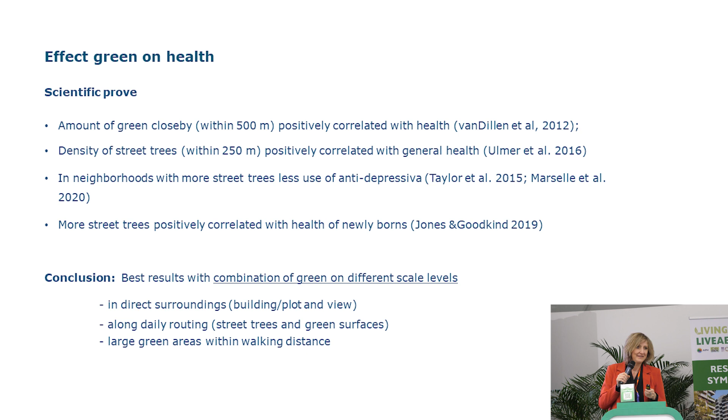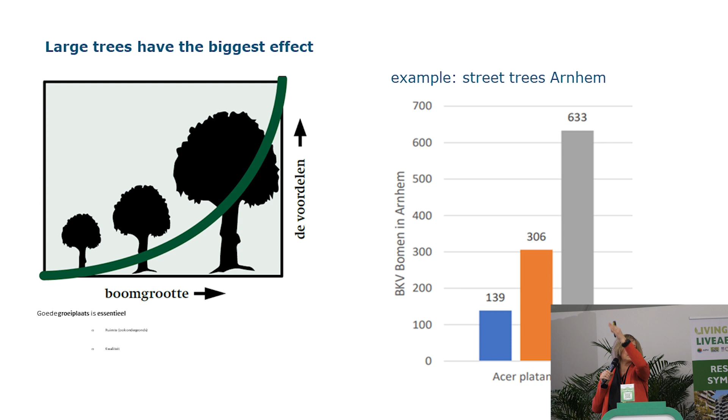So what we already said, green has a lot of influence on health, for exercise and sport, but also for social contacts. A lot of people, also in cities nowadays, are quite lonely, as research shows. So letting people outside, doing community gardens, really helps to create a more social green area outside. The biggest effects, also from this research, come from the biggest trees, so the biggest trees are the most effective in this research area, which is interesting.

And where do they have effect? Trees, of course, are well known for air quality, but the study also says that the air quality effect in urban areas is not so high, it's mostly on large-scale areas. What they have to do is plant a huge amount of trees, mix different species, and indeed avoid a tendency for bad air to loop in the street. So that's also an important thing to think about when designing with trees.

But in Holland, a big issue, or at least an issue, is heat stress.

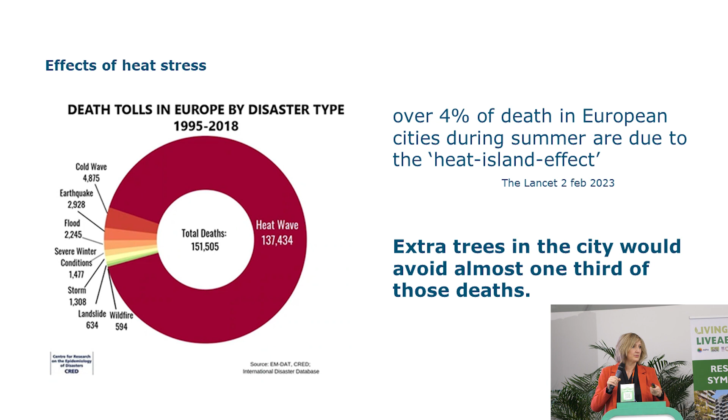Over 4% of the deaths in European cities during summer occur from heat island effects, which is quite a big number for a cool country like the Netherlands. More interesting is that extra trees in the city would avoid a third of the deaths. That's an impressive number, something we can work with.

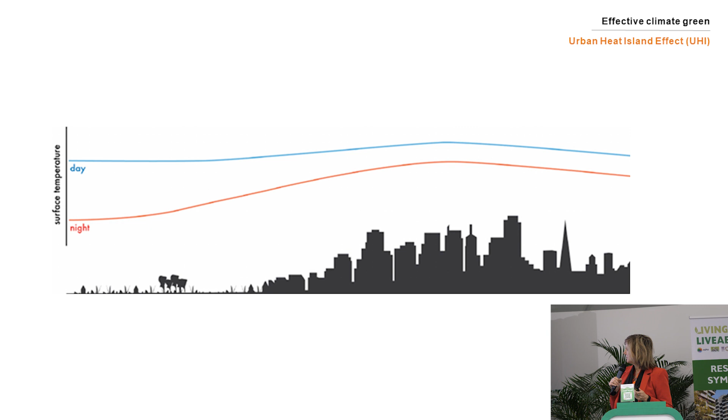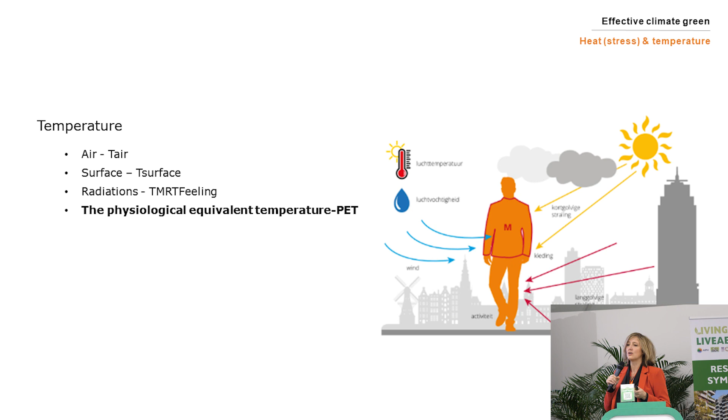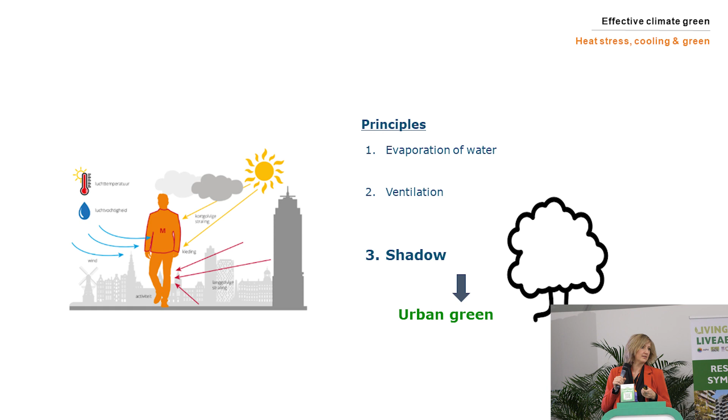What Wageningen did was research about PET temperature - the feeling temperature, not the actual measurable temperature, but what people feel when they go out. It's calculated with evaporation of water and ventilation, but shadow has the biggest effect on PET temperature. They did real measurements with research equipment, same conditions in sun areas and shade areas, to see the difference.

We also saw this in the Japan pavilion yesterday, but here you can see the difference in temperature between a hot area and the shade of a tree is about 12 degrees. So it really has a huge effect on the health of people.

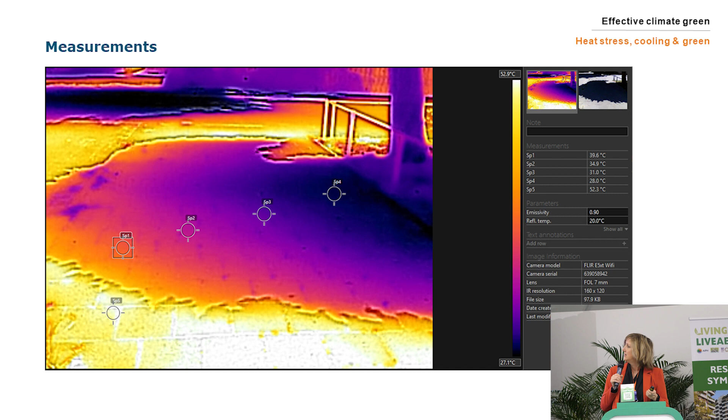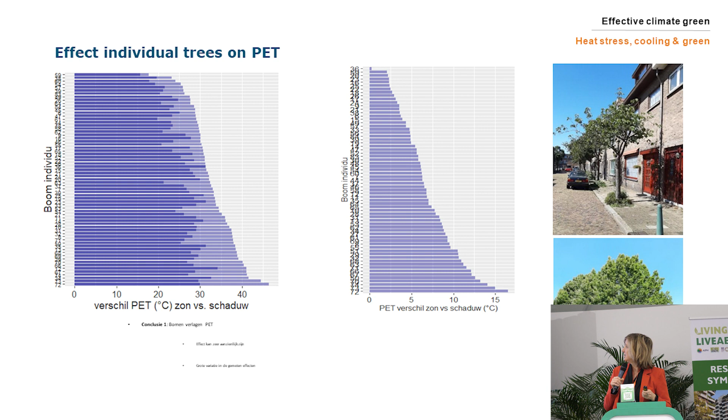They also did research about tree types and what effect each has on lowering temperature. Of course this is quite a big range, depending on the tree species - that's part of the research. Even within one species there's quite a difference, so it's hard to mark exactly how much it is, but we can see that the shadow effect is the biggest factor. There's considerable variation, but the effect remains large - I think that's the most important finding.

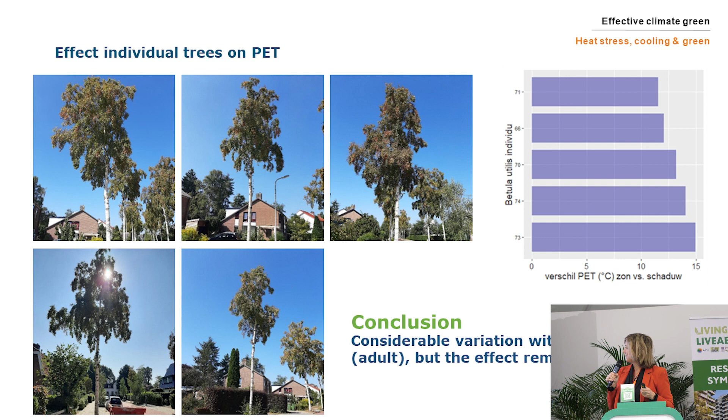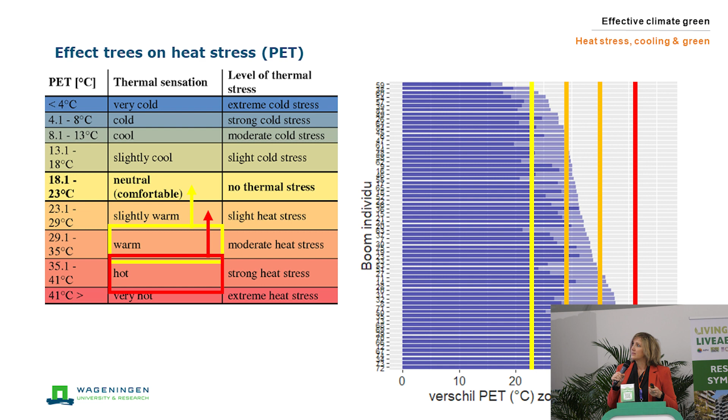What's good to see is that with the effect of trees, a hot day or warm day can go down to a neutral day or slightly warm day. That's quite a big effect of trees, and also shows in the results on deaths from heat stress. So with trees we can have the biggest effect.

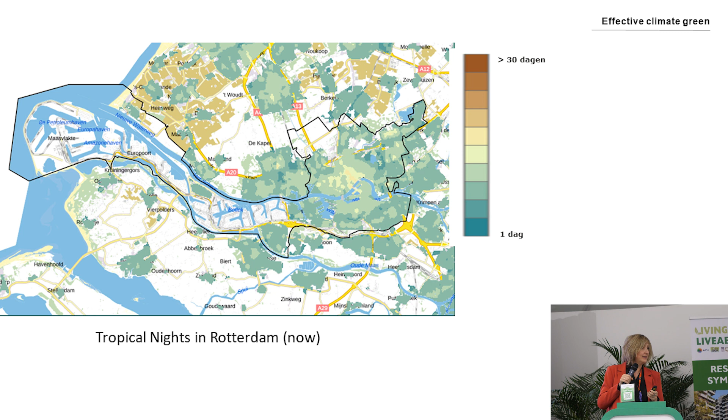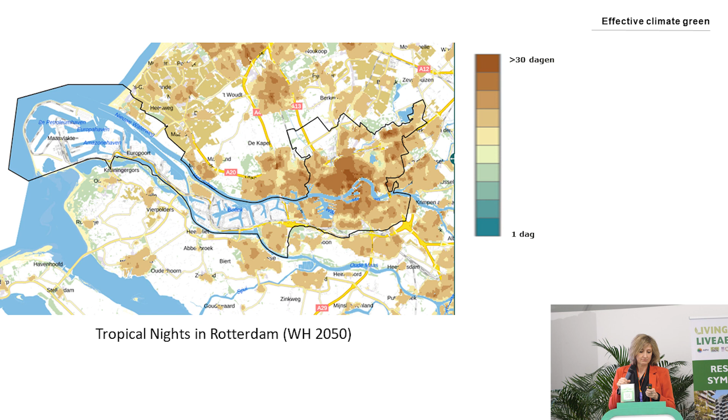Is this necessary in the Netherlands right now? We have tropical nights here, for example in Rotterdam, but by 2050, 40 years later, tropical nights will be much more frequent. So that's something to think about - we have to take action now, because if we plant trees now, the effect will only be noticeable in 30 years. This is something to really be aware of and act on.

This is the project we worked on in more detail. We did the design and the workshop, and simulation with ENVI-met - it simulates the build-up of the street and the shape of the trees, then calculates the effect on temperature. Lastly, we made a design book with templates for all the streets and neighborhoods, showing what has the biggest effect on the climate.

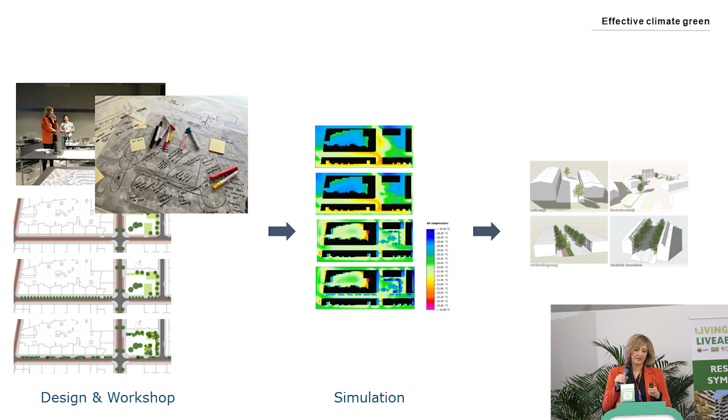Our role in this project was working with workshops, since we're landscape architects. We think about what is suitable for each neighborhood together with the municipalities, and transform that into a 3D graphic result - that's our design contribution.

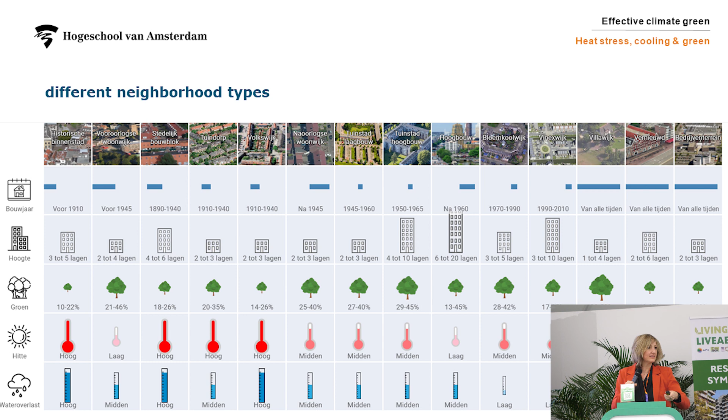What did we do for this project? In the Netherlands we have a lot of different neighborhood types, and each period has a different city style and way of building. We checked many of these neighborhood types to see where the biggest heat stress was and where there was the least green. We also checked which neighborhoods were being redesigned at the moment, so we could implement the right tree implementation at the right time.

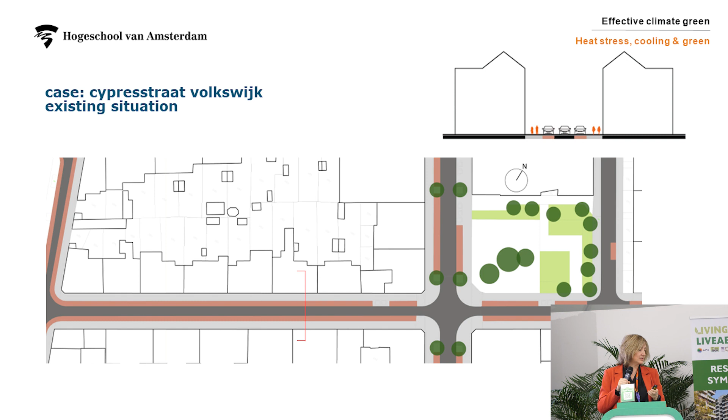So we came to four neighborhood types, starting with the Volkswijk. As you can see, the Volkswijk doesn't have a lot of green - it was a neighborhood from around 1910, built for a lot of people but without much integrated greenery, and a lot of parking. This is the actual existing situation - mostly parking on both sides, not much green. With the high buildings, heat stays trapped, which is a problem for radiation cooling at night.

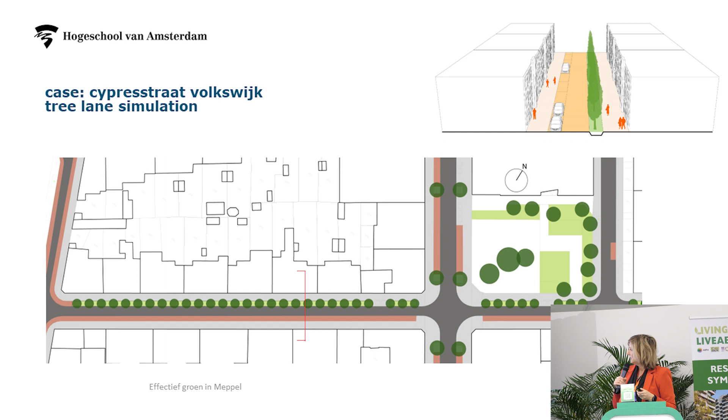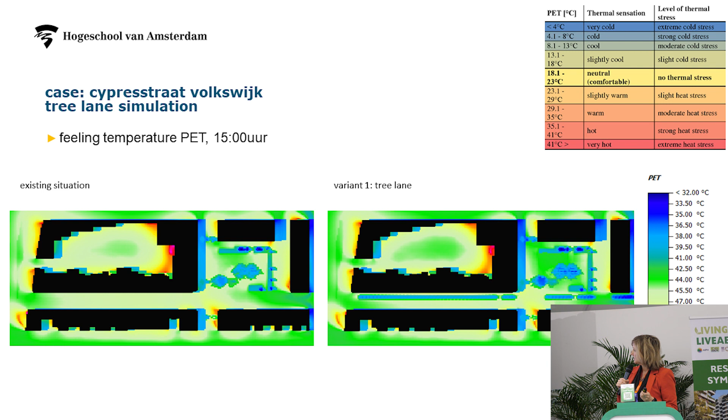So we did several models to see the effect of green. In this one, we created a long lane of trees on the north side, which has the biggest effect on pedestrians who walk during the day under the trees. This is the result, comparing the existing situation and the variation with the tree lane. You can see that the temperature drops quite a lot. The research shows it drops 2 to 9 degrees PET temperature. On the actual temperature it's almost nothing, but the feeling temperature has the biggest effect for the people who live there.

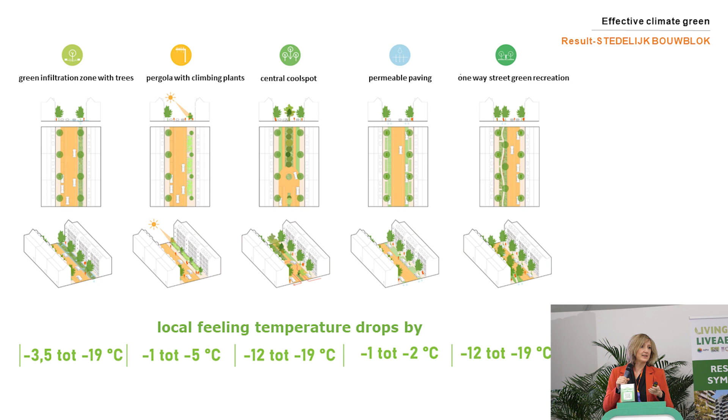The next one is the stedelijk bouwblok. This is normally higher buildings, with the same research. What we did there, we also checked if sometimes the street can be removed so we can create a real cool spot. There the recreation and green structures in the city should be very strong, and the car can go out. In this way we create the biggest effect of green areas. It doesn't only have a nice effect on temperature, but of course the feeling of the street is also much more pleasant to walk through.

So in total, we made a package, an optimal option for each type.

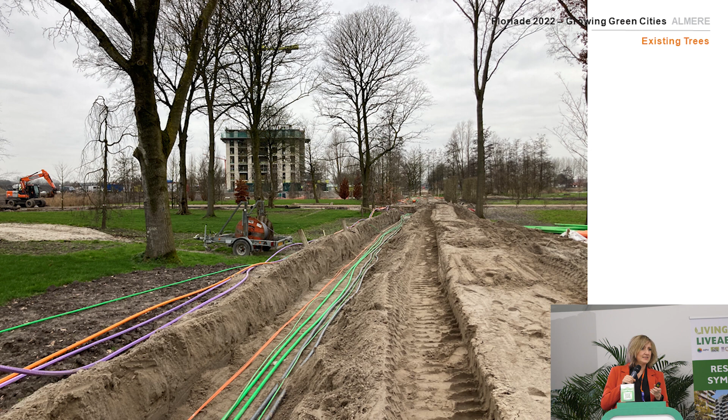Some trees we marked with a special marking for the project footprint. This way I really wanted to show the effect of the existing green in the park. But the builders were not always very happy with the streets because there was a lot of cables and paving to be done. They said, can we not cut some of the trees? So we really made sure that they were kept, and finally the trees were still in the location, so we were really happy about it.

Of course they don't really fit in the grid, but I think that's really nice because it shows the story of the area, and it makes sure that the car is not as important anymore. The green is really the base of the new cities. Here the water is all integrated in the design, so it's a nice way of dealing with green, which is not normal in a way, but we hope it will be normal to keep the existing trees. This was the Qatar pavilion in the Netherlands.

This was also a challenge. This was an existing oak tree. Recent research has shown that the European oak tree in the Netherlands can host up to 450 insects on one tree only, so it's very good for biodiversity.

But of course, within this rigid grid, there should be a bridge there, so they said, can we not take the tree down? Finally, with a lot of extra work, they built the bridge, kept the tree, and we're really happy that it's still there. Also here in Japan, the lane of trees is a really beautiful background to the garden, and we really saw that a lot of people use the shade of the trees to have dinner and to recreate during this busy expo.

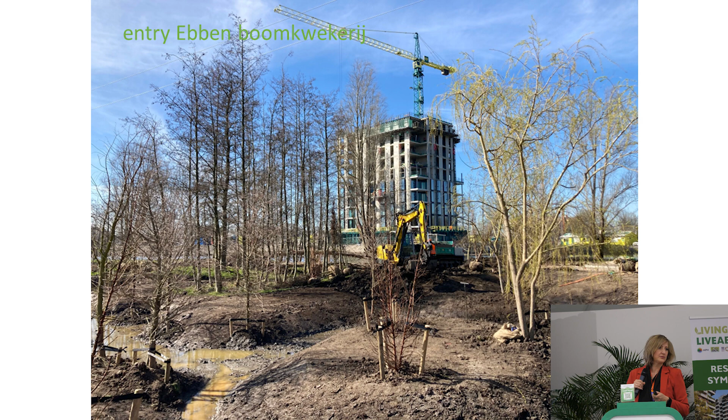The other thing we did 10 years ago was writing the green city guidelines, together with Wageningen University. A lot of research has been done, and a lot of scientific research. It's free to download, so it's interesting to see.

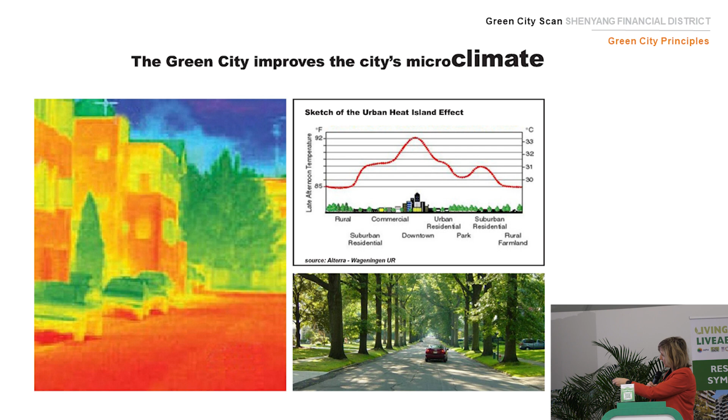What we asked when producing this book is if we can make a green city scan for some cities in China. So what we did there is make a grid of parks over existing neighborhoods, because people need green accessible for them. A pocket park at a distance of 200 meters is essential, and then the next layer of parks is essential, so this way it's a total network of green areas. What's also interesting is that one big park has less cooling effect than 2 parks beside each other, so it's interesting to see where to put which type of park.

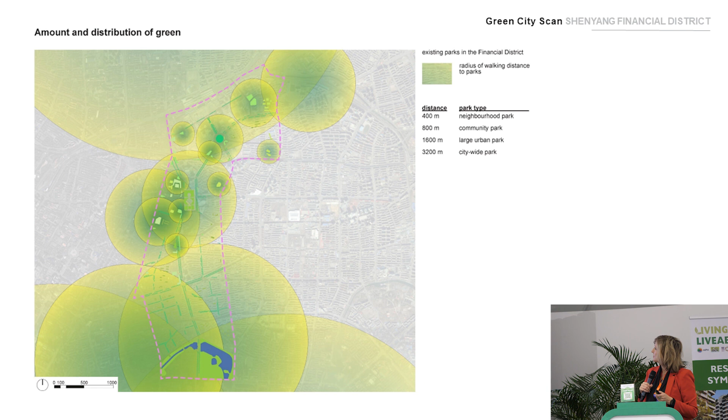So we checked, for example, this one in China: the existing parks, the walking distance, and the radius of the existing parks, and then overlaid this new type of park grid on top to see the result. Finally, we also integrated the existing parks because we cannot always make space exactly there. And what is the goal? This one has 8% of the total area as parks, but of course the ideal situation would be 25% green in the new neighborhood. It also depends on the density of the people who live there, but that's the goal for a really green city, with accessible areas, so it will cool down the city - that's the most important thing.

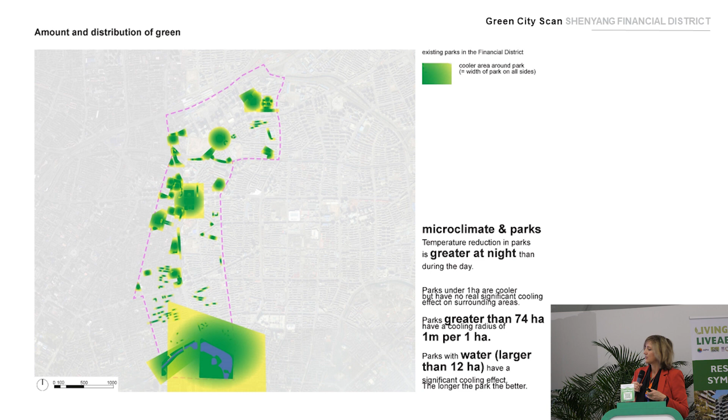And cool down, but also focus on healthier people and healthier cities.